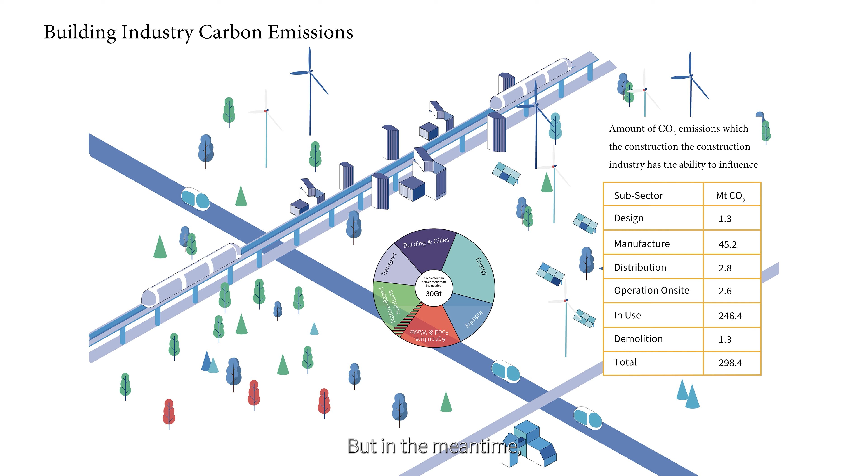But in the meantime, we are not on the right track. According to the report by Materials Culture called Circular Bio-Based Construction in the North East and Yorkshire, only in the North East and Yorkshire of England, there are 2.8 million homes to be retrofitted to meet the EPC Band C standard. Also, the RIBA Climate Challenge target requires that the embodied carbon within buildings should be reduced from 1,200 kilograms per square meter to less than 625 kilograms per square meter. In order to meet the 50% reduction of embodied carbon, there will need to be drastic changes.

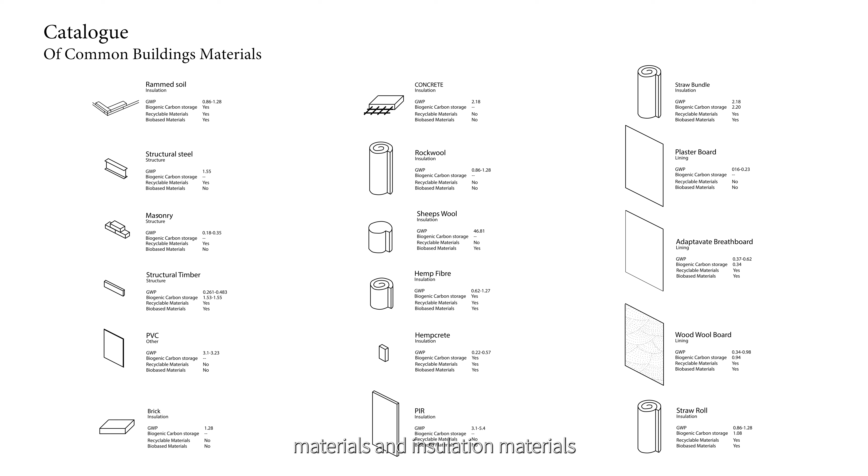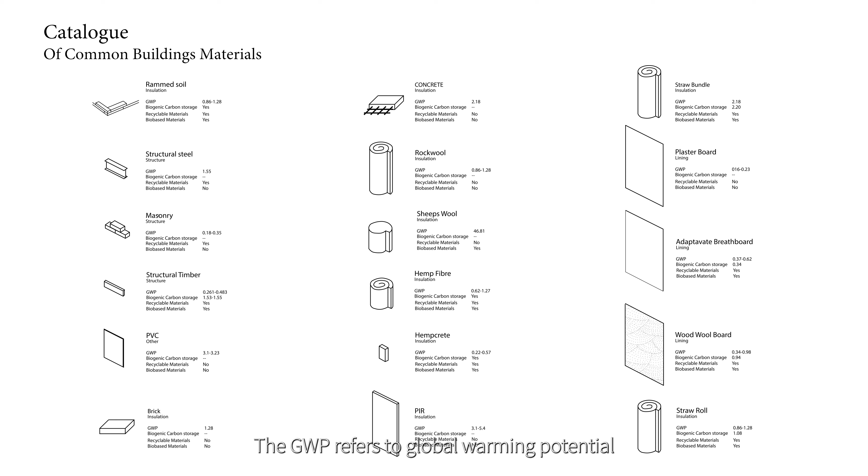An alternative to these has been the exploration and use of bio-based materials, which are characterized by their environmental friendliness and alignment with low or no carbon emissions. This is a catalog of many building materials and insulation materials that we are using nowadays, including both conventional materials and bio-based materials. The GWP refers to global warming potential. Bio-based materials have large advantages over conventional ones. This means that using bio-based material in construction brings significant benefits compared to the current building methods.

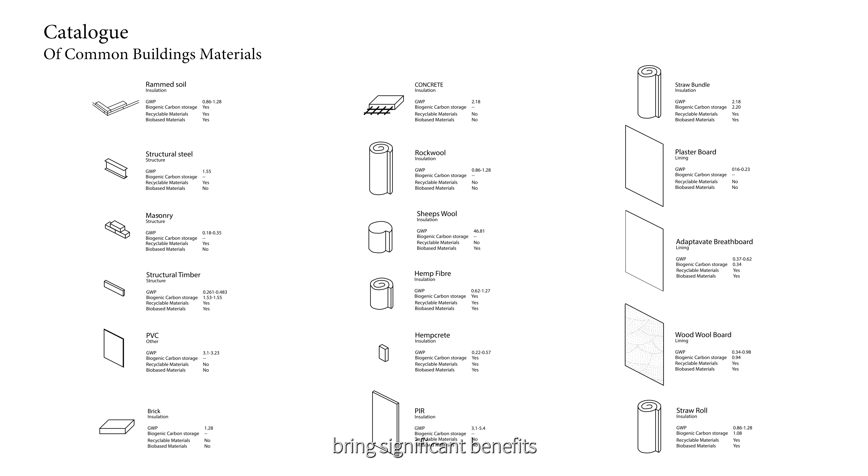The other is a diagram showing the comparison between different building materials and how much carbon dioxide they produce cradle to gate per kilogram. We can see that the bio-based materials, for example, straw, wood fiber, timber, and hempcrete, have totally different characteristics to conventional materials such as concrete, steel, and plastics. They not only have lower carbon emissions in the process, but even absorb the carbon within themselves.

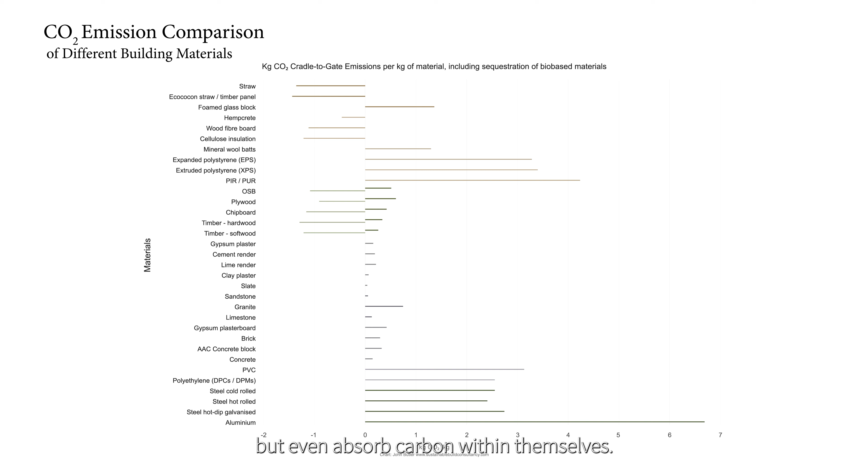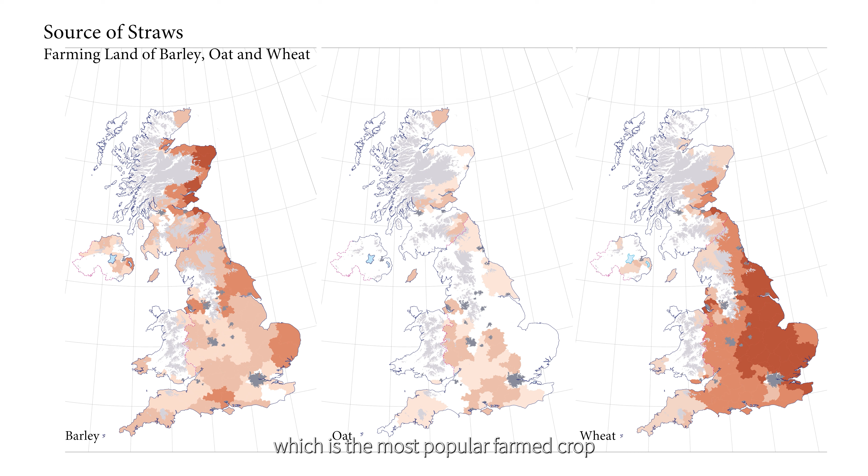In terms of availability, these maps show us the spread of farmland of barley, oats, and wheat in the UK. Wheat is the most popular farmed crop in the country, with a good capacity to adapt to the changing climate and the environment. Straw stalks can be extracted from them and made into different kinds of bio-based materials, such as straw bales or prefabricated straw panels.

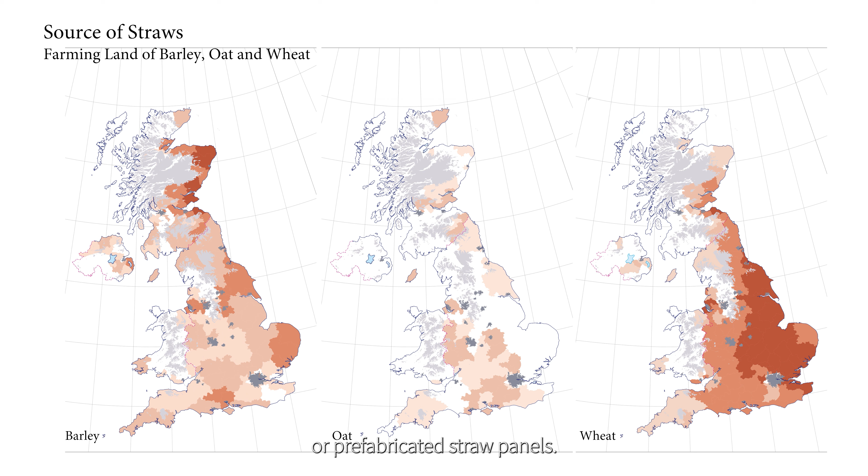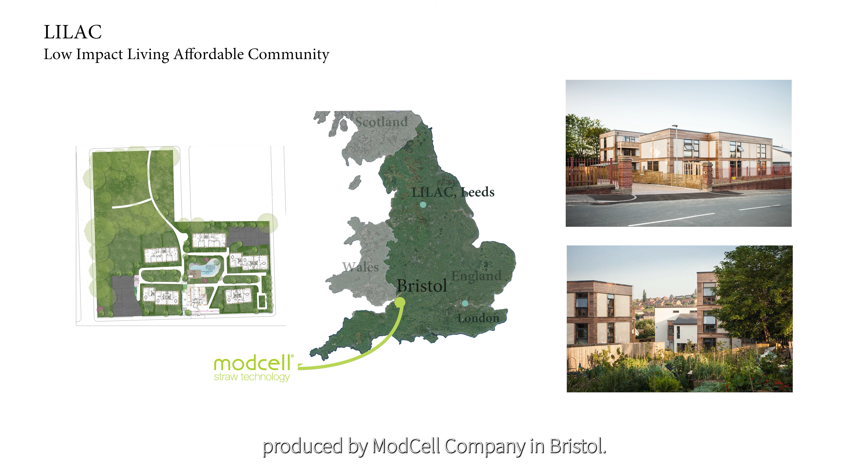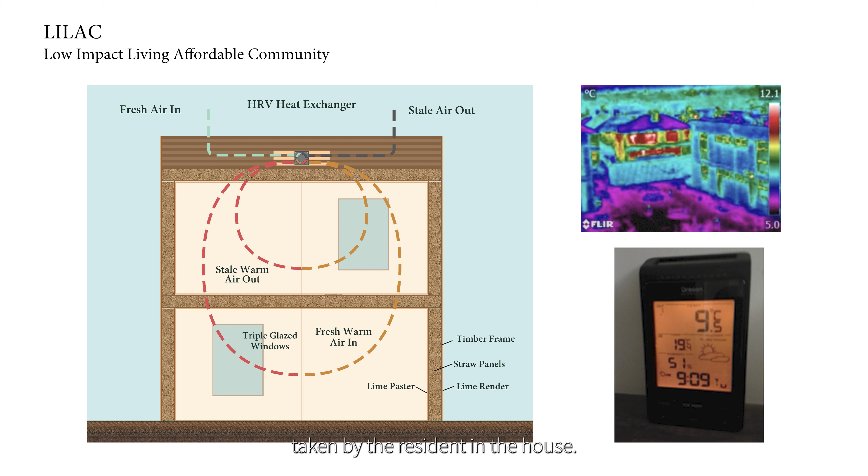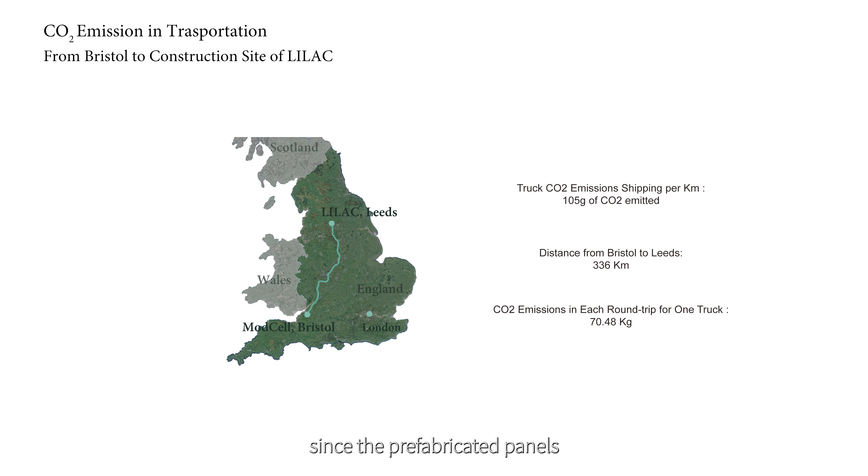Here is a representative project called Lilac, located in Leeds, built with prefabricated straw panels produced by ModCell Company in Bristol. It costs less money to build and has extraordinary insulation performance due to the characteristics of the materials. Here is a thermal image taken by the researcher, and the other is a picture taken by the resident in the house. As we can see, the heat escaping from the houses is lower than the houses behind, which use conventional materials to build. But still, since the prefabricated panels are produced in Bristol, transporting them from such distance demands several trucks driving hundreds of miles.

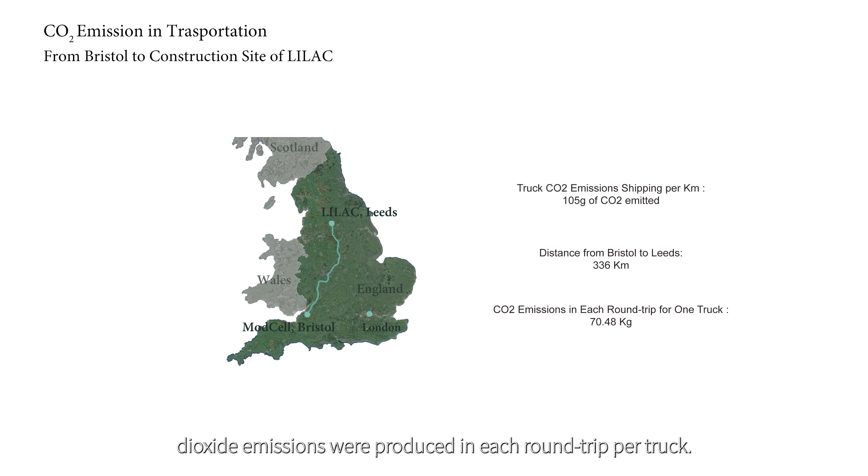A quick and rough calculation shows at least 70.48 kilograms of carbon dioxide emissions were produced in each round trip per truck. From this issue, we can see that only using bio-based material doesn't mean that the building industry can be transformed or that the net zero policy is enough to reach goals such as the Paris Agreement of 1.5 degrees. To minimize carbon emissions, we should not only improve the materials we use to build, but also think about the carbon dioxide we produce as part of the whole system that makes up the building industry.

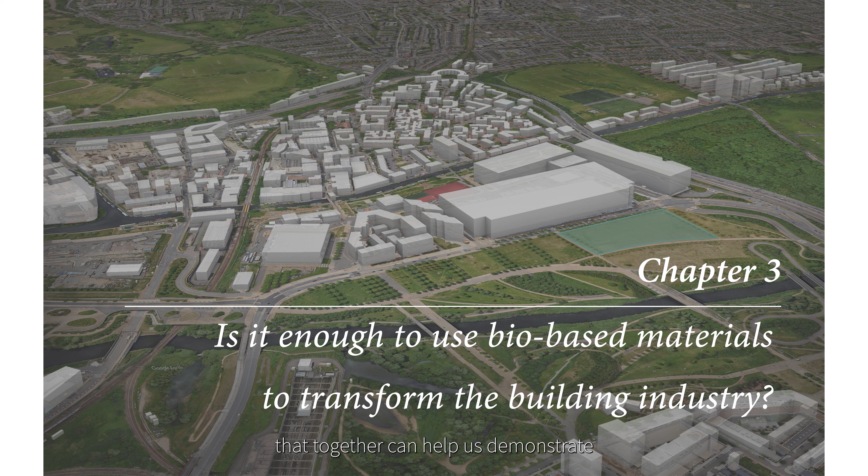To test this basic idea, we looked at 3 projects that together can help us demonstrate how a new strategy for the building industry can start to be imagined. So, we studied the main features of these 3 projects to see how they can be linked to further our research.

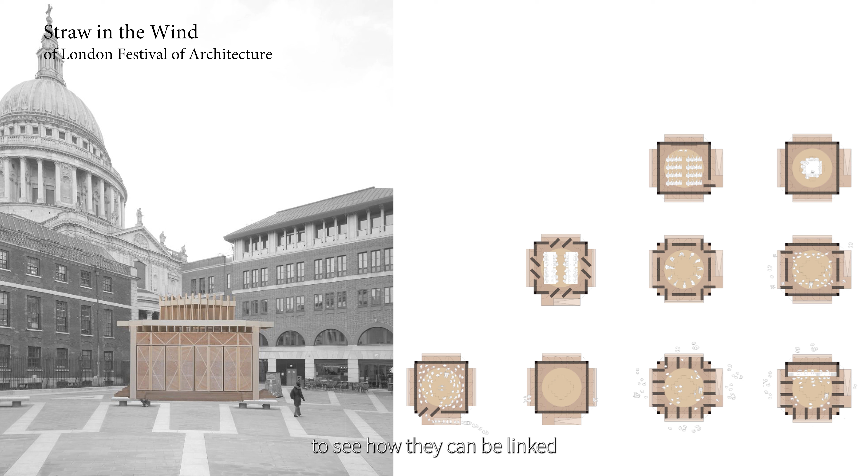First, we took a look at the winning proposal for the Eco Home Pavilion promoted by the London Festival of Architecture, called Straw in the Wind. It has been planned to be built as a temporary building in front of St. Paul's Cathedral in the summer of 2024. Made from straw, the purpose of the pavilion is to raise awareness of bio-based material and to demonstrate that, for example, straw can be used as a construction material with many properties and advantages over materials like concrete, bricks, and steel, and provide a carbon-neutral building.

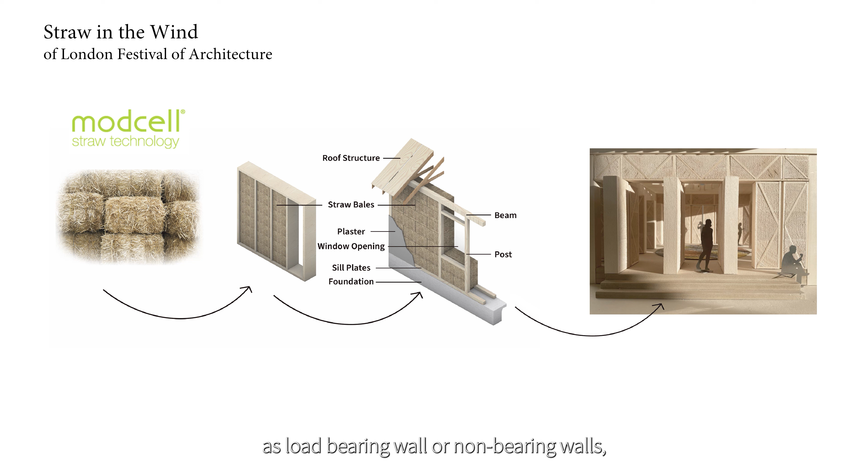We want to see how it is designed, what it takes to produce these building materials, and whether it is possible to produce them on site. To answer these questions, we start by analyzing the pavilion structure to understand the components they're using. With straw filled into the timber frame structure, Modcell Company provides this kind of straw panel that can be directly used as load-bearing or non-bearing walls. Straw in the Wind used these panels to structure the pavilion. Revolving panels can open or close the walls, allowing people to pass through every side of the pavilion and making it a versatile space for a flexible future program.

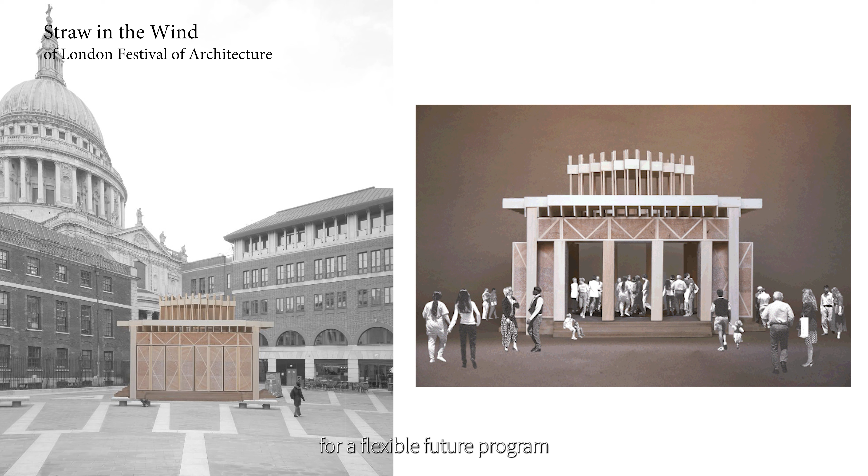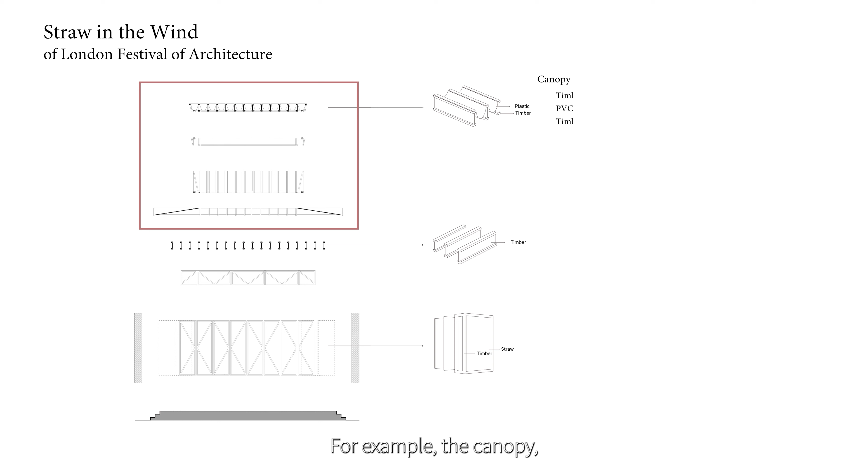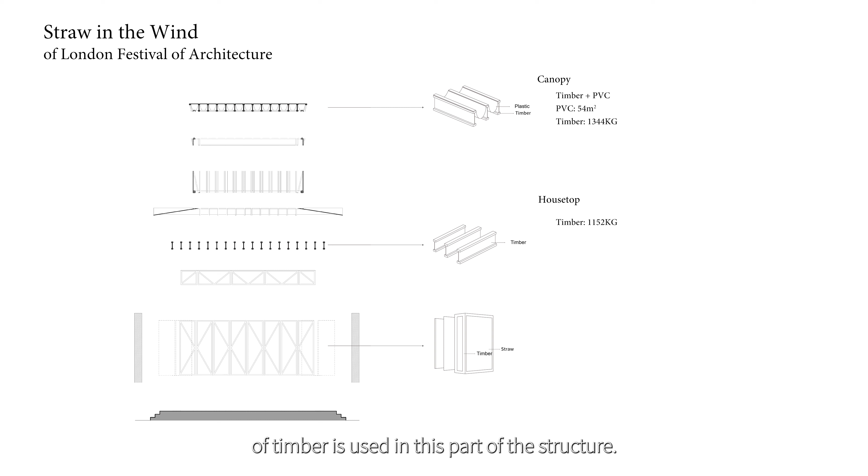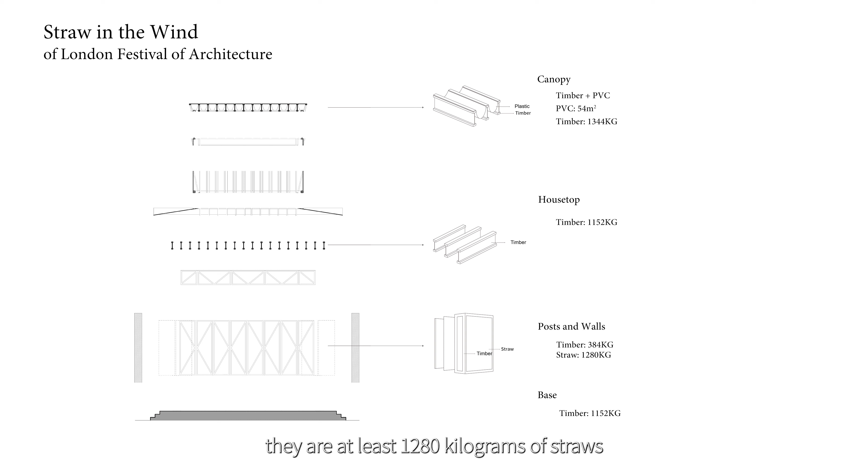In order to have a further understanding of how the system works, we calculated the amount of materials needed for the pavilion. For example, the canopy consists of timber and recycled plastic sheets. Timber is about 1,344 kilograms, and the plastics are around 54 square meters. As for the housetop, the beams are all made from timber. Approximately 1,152 kilograms of timber is used in this part of the structure. Beneath the top, 4 timber posts support the ceiling, and all the surrounding walls are made from straw panels. In the panels, there are at least 1,280 kilograms of straw, and the timber frame weighs about 384 kilograms.

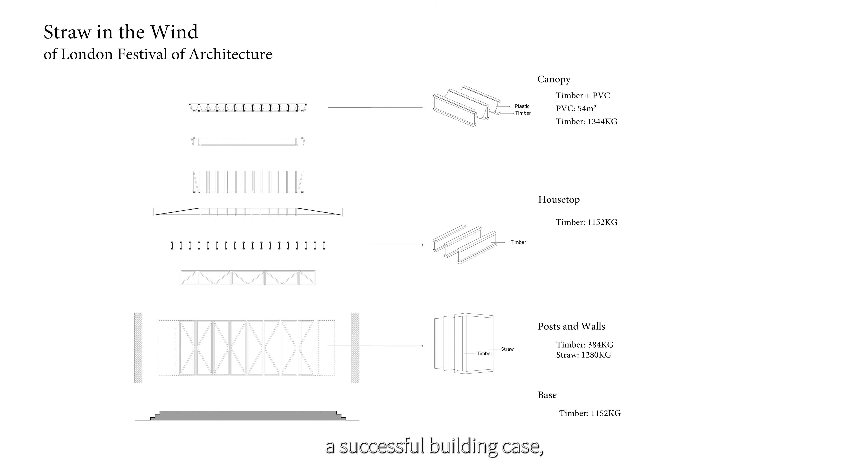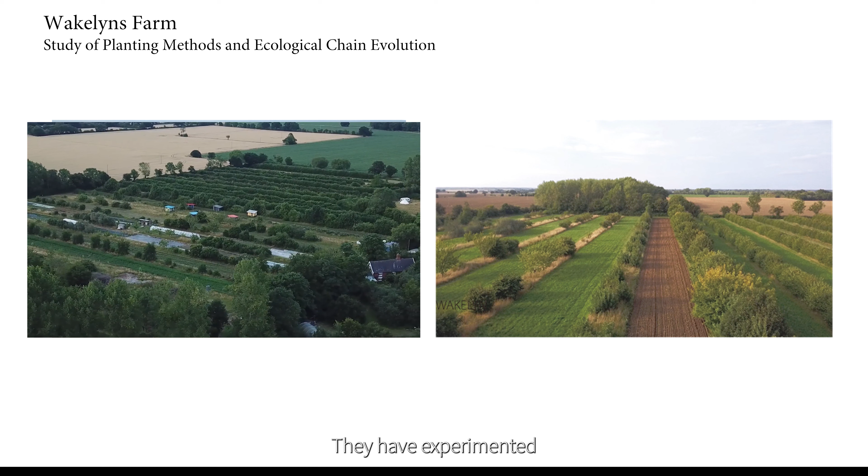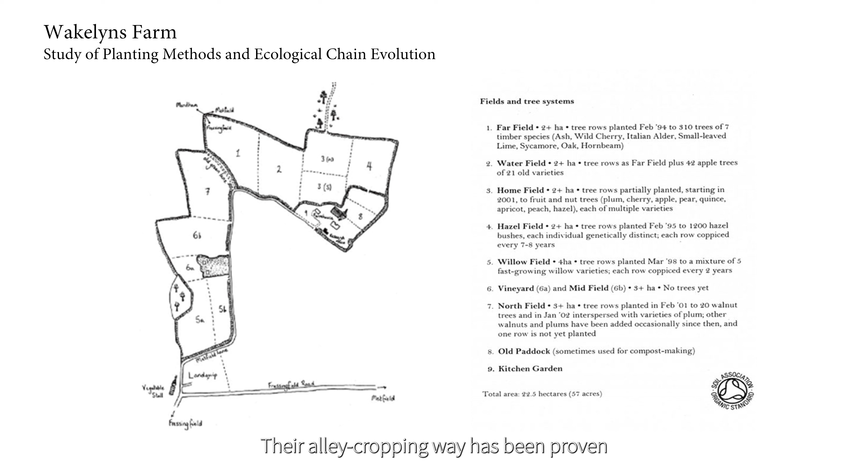This project provides a successful building case, but what about the production and manufacture of the materials? Is it possible to integrate this with the principles of agroecological production? So this is why we study another case called Wakelyns Farm. Wakelyns Farm is a 22.5 hectare arable farm in Suffolk. They have experimented with agroforestry systems and collaborated with the Organic Research Center to collect data and promote sustainable agriculture. Their alley cropping has been proven to be the best way of crop farming nowadays.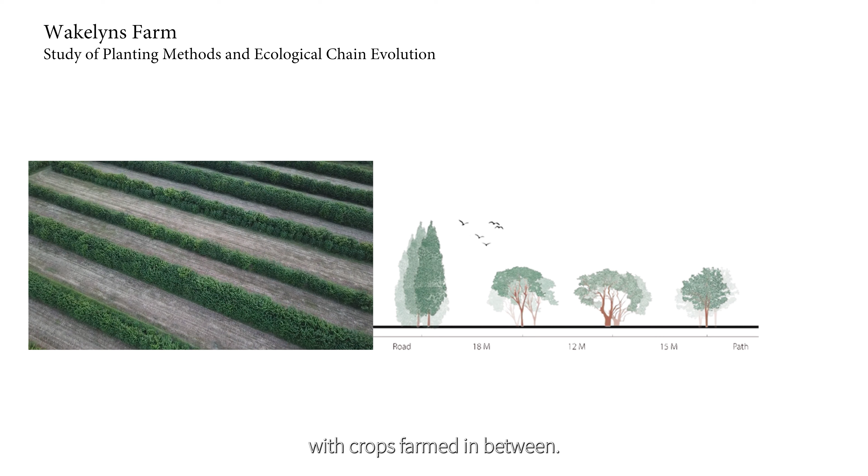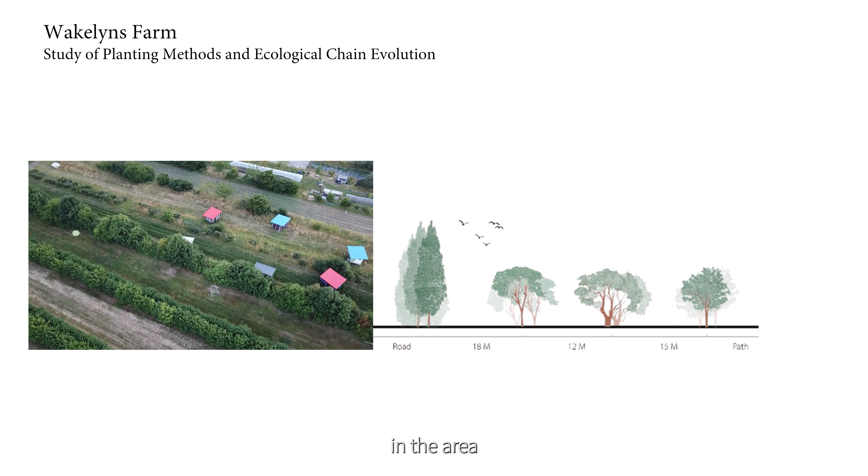They have in total 56 rows of trees in the whole area, with a tree row gap of 10 to 12 meters. With crops farmed in between, they can prevent insects from attacking crops from land to land and keep fragile crops away from the strong wind. They also help to build up the environment in the area by producing wood sticks and experimenting with hemp production. This diagram shows the biodiversity evolution in the first few years Wakelyns Farm was established, which is an added value of this type of agroecological environment.

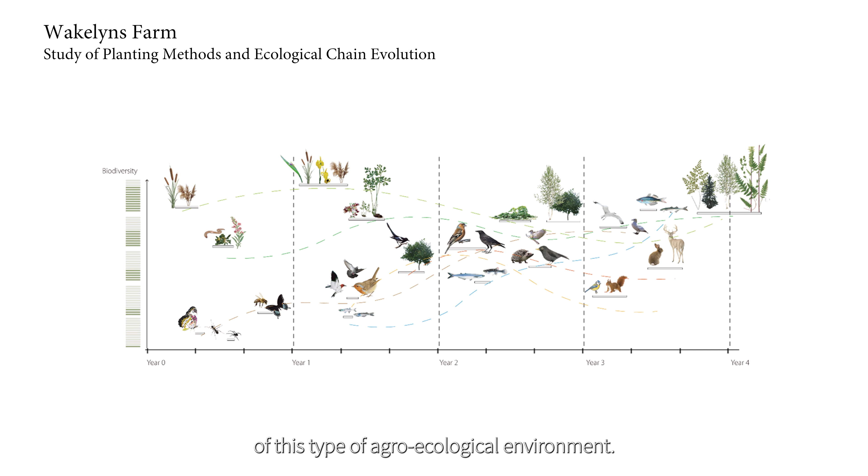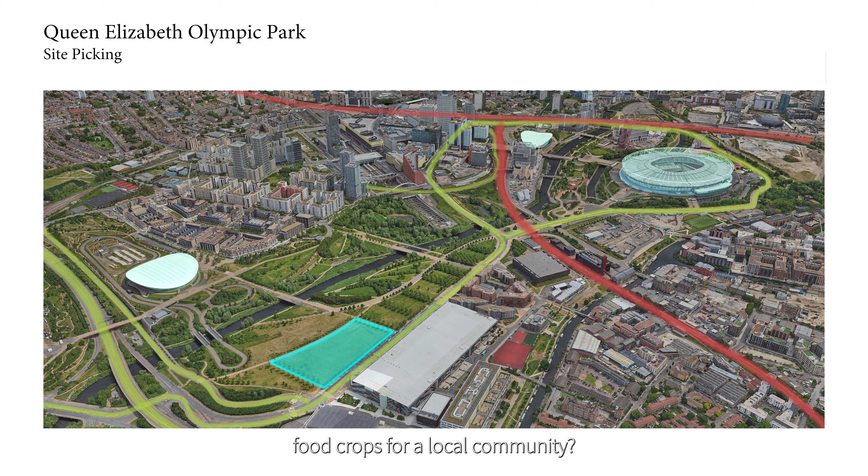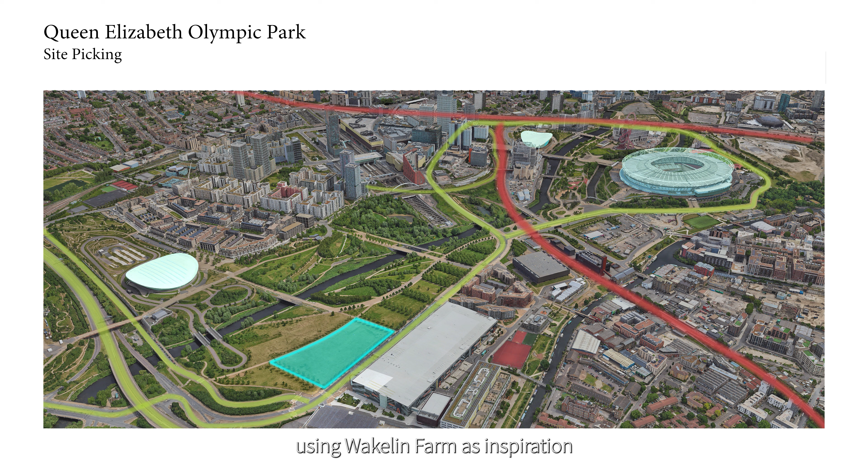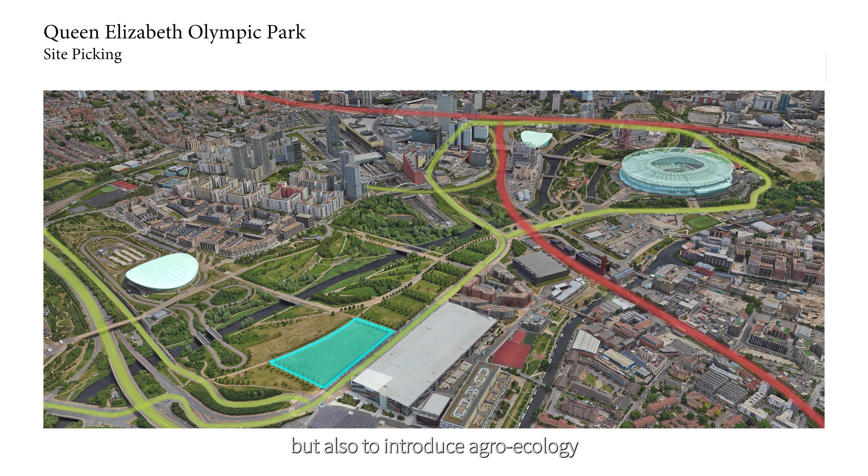So, instead of bringing straw from large monoculture landscapes, how about farming and collecting the straw from our own site and using it on site, while providing a variety of food crops for a local community? Finally, we decided to test this in Queen Elizabeth Olympic Park, using Wakelyns Farm as an inspiration to organize agroecological farming. We are going to select a piece of land where we can potentially plant and harvest straw to build the Straw in the Wind pavilion, but also to introduce agroecology, so the pavilion can be provided with materials and products for its future program by our agroecological landscape.

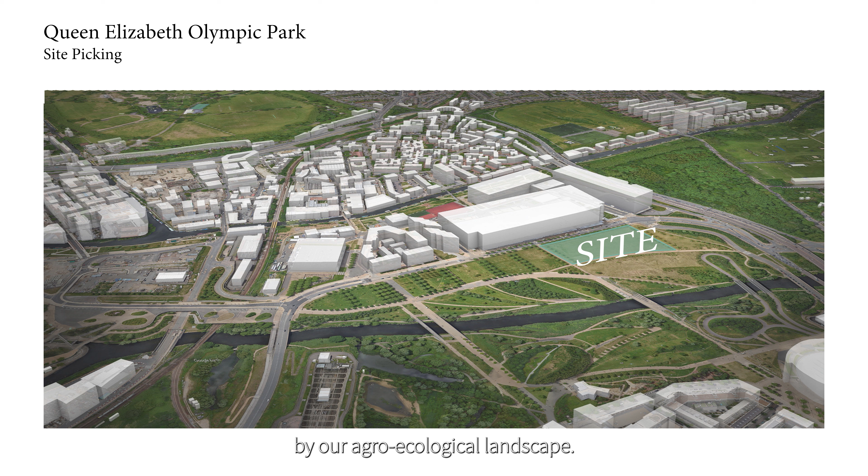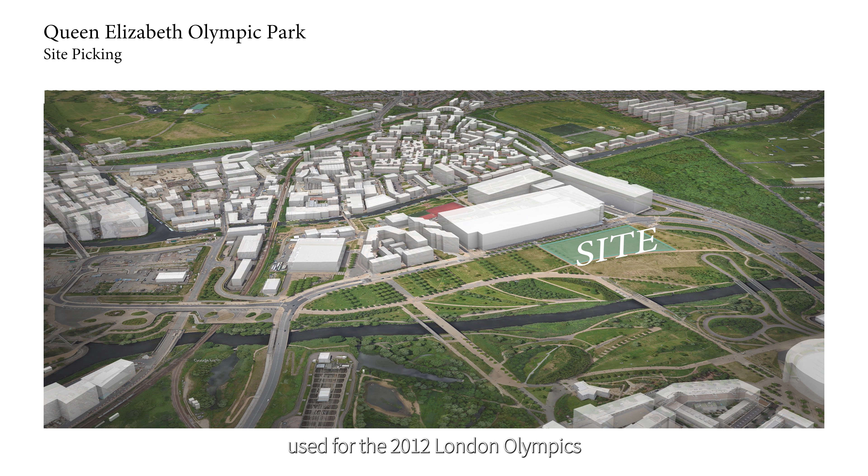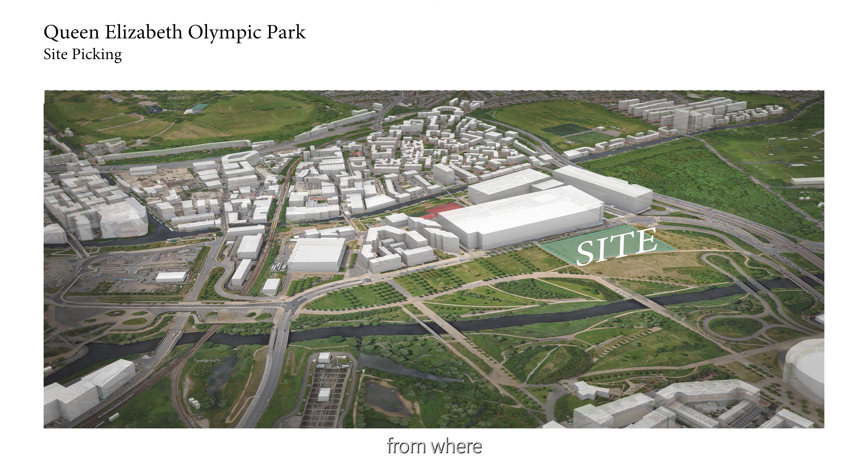We selected this piece of land within the Queen Elizabeth Olympic Park. It's in the east of central London, used for the 2012 London Olympics, and is now a part of the parklands. We imagine that we can lease this patch of land in a similar way public interest enterprises have been doing in the park to provide services, such as the commercial pavilions existing throughout the park. The land marked is today a rarely used lawn within the park with little or no vegetation. Still, it is an interesting location next to Hackney Wick, a hub of the creative and fabrication industry, from where we could draw some synergy in the future.

Our plan is divided into 3 major parts: healing, farming, and sharing. When we looked into the site, we noticed that soil health was influenced by former construction that happened upon it. The first thing to do is to heal the soil.

After restoring the nutrition of the soil, we should move on to farming. Farming includes crops and other vegetation. After harvesting enough, it is to share the benefits of the harvest with the community.

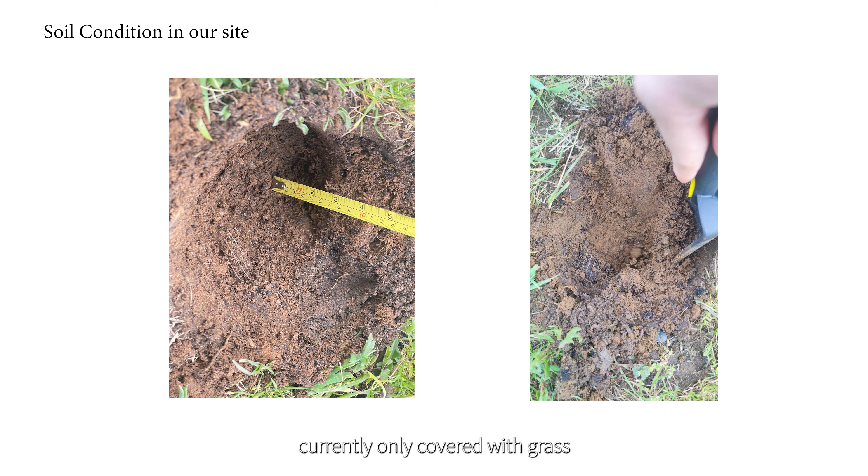The soil situation is that sandy soil is on the surface, currently only covered with grass, with some earthworms about 10 centimeters down after digging.

In the first year, the primary focus is on soil improvement. The site is known to have soil that was treated to mitigate pollution after the 2012 Olympics, and it meets the conditions for herbaceous plant growth. However, some deficiencies still exist in the soil structure.

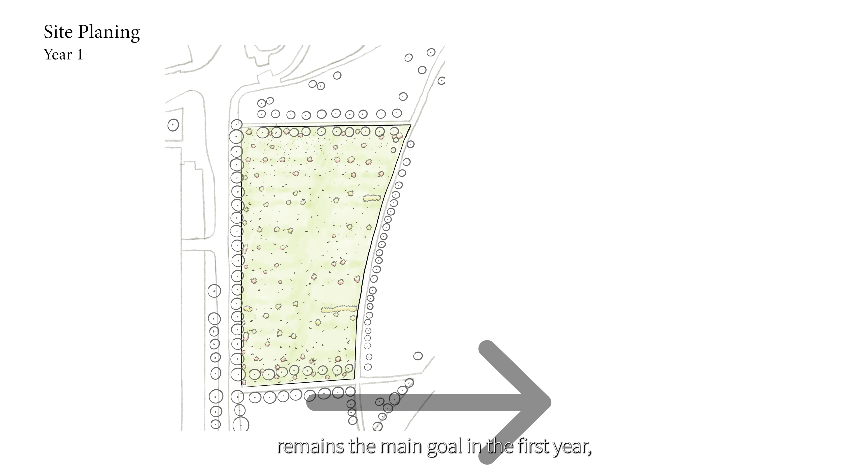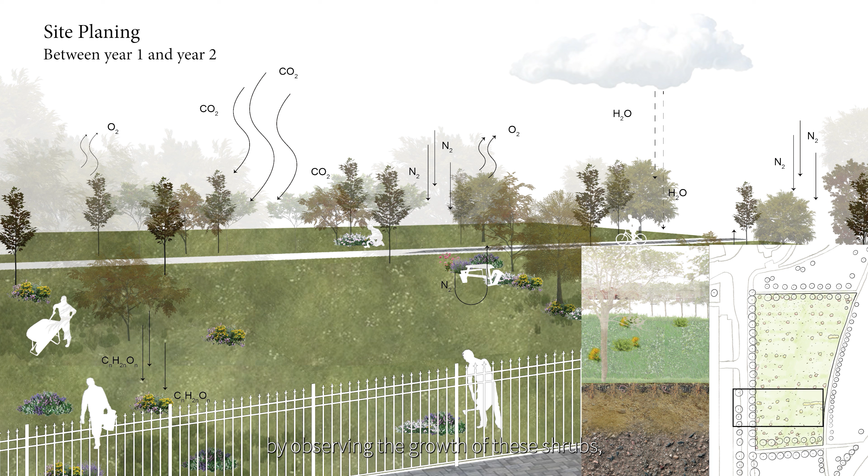So soil improvement remains the main goal in the first year, using 3 kinds of nitrogen-fixing plants to transform the soil of the site. These plants have nitrogen-fixing bacterial symbiosis on the root system, and the soil's nitrogen content increases after planting. During the transition from the first year to the second year, some small shrubs are interplanted to assess soil quality by observing their growth, providing insights for future planting.

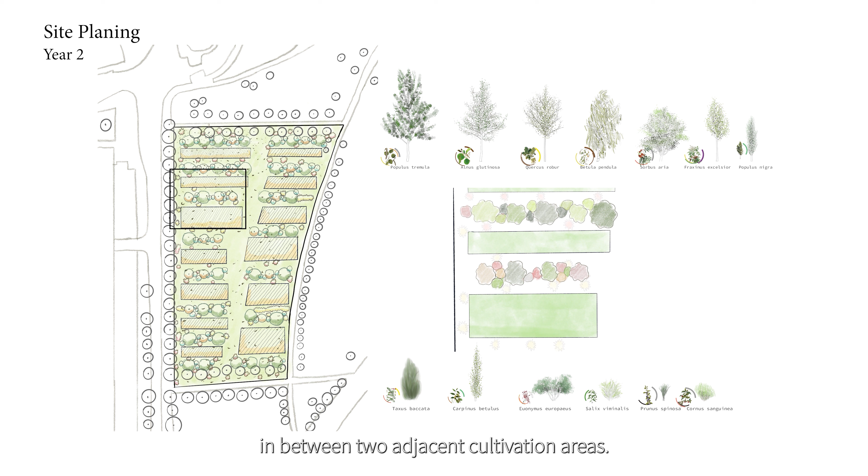In the second year, trees start to be planted. Following the experience of Wakelyns farm, tree rows are planted between 2 adjacent cultivation areas. This reduces wind damage to young crops, and also provides some insulation against pests and disease, reducing the environmental impact of pesticide use.

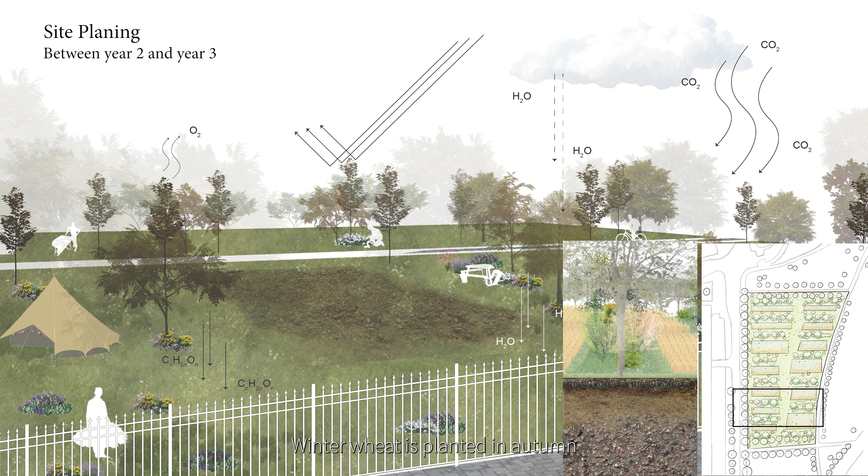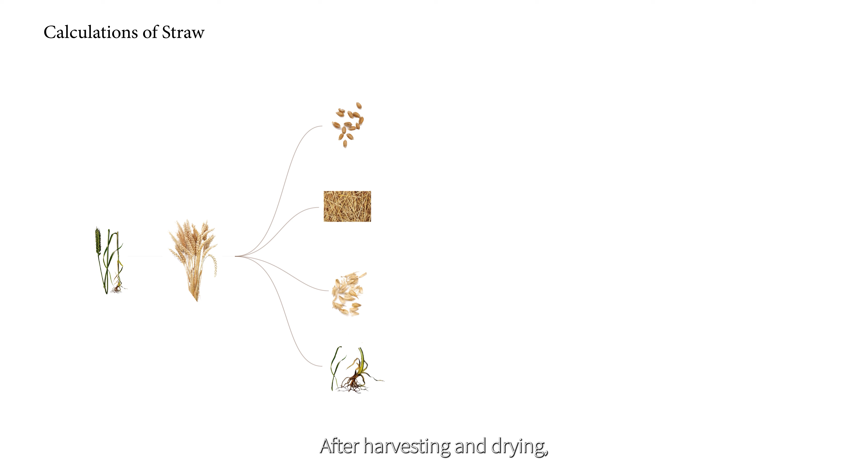In the cultivation areas, winter wheat is planted in autumn and harvested the next summer. The first picture illustrates what a wheat crop looks like. After harvesting and drying, we acquire the dry matter of the wheat.

For our project, we will focus on straw and what is needed for its production. 51% of the weight belongs to the grain, 32% belongs to straw, 11% belongs to the chaff, and the remaining 6% are leaves and dead shoots. 32% of them are what are known as straws.

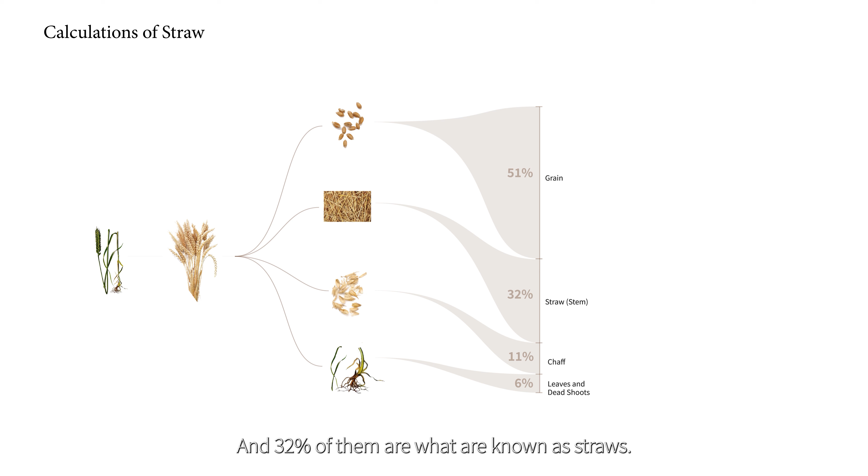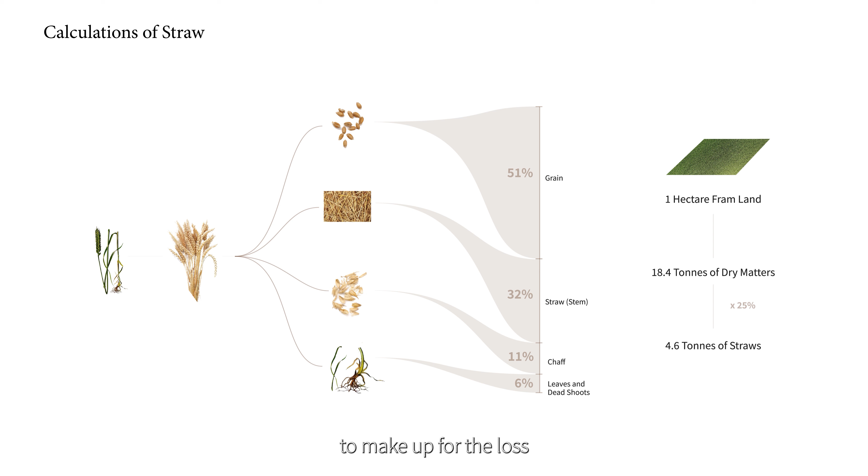According to existing statistics, in 1 hectare of land, you can harvest 18.4 tons of dry matter in 1 year. To be safe, you can count on 25% loss through transportation and selection. That means we can acquire 4.6 tons of straw from 1 hectare of farming land.

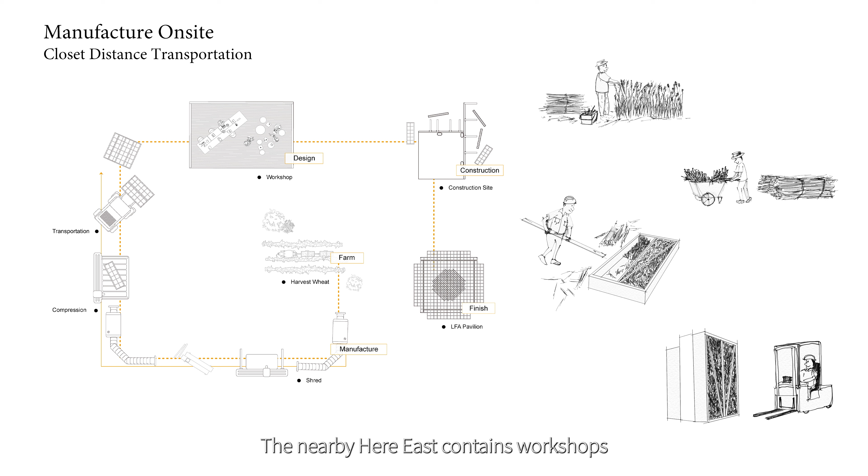The nearby Here East contains workshops and university labs, which can help us with the manufacturing process. Also, the ModCell company can provide the expertise necessary to assemble the prefabricated straw panels.

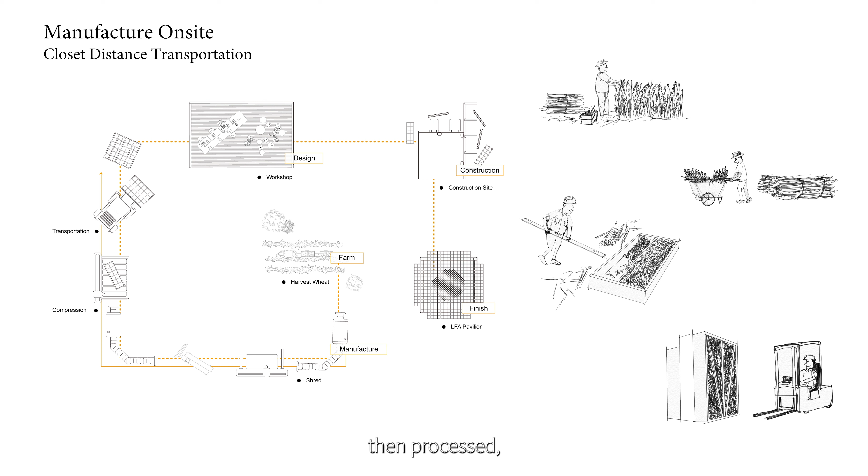After harvesting the wheat straw from the site, the raw materials would be chopped and processed. Then it would be filled into timber frames and made into panels. The panels can be used on site to build up a pavilion.

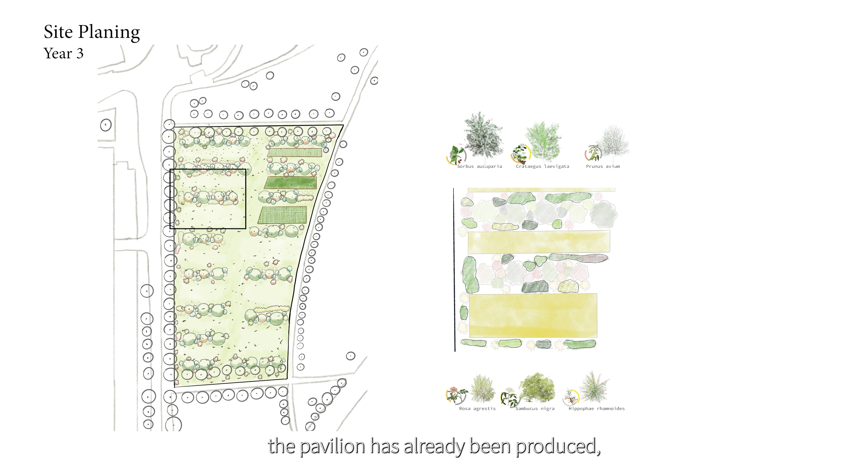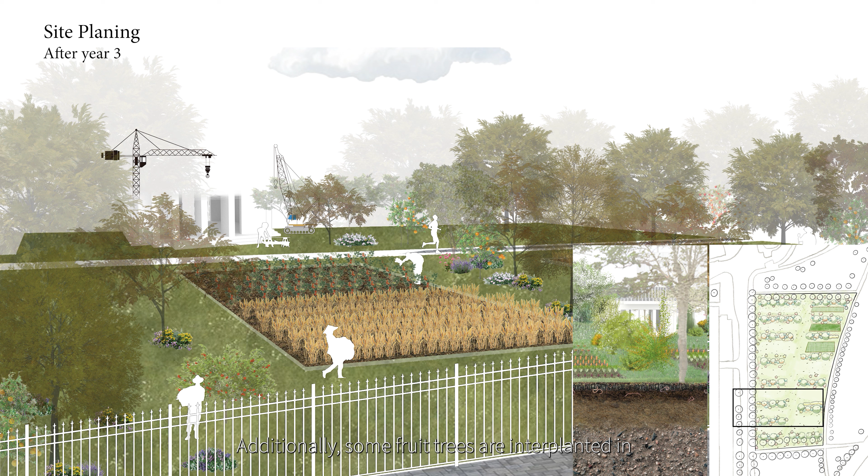Then in the third year, as most of the straw required for constructing the pavilion has already been produced, some straw planting areas are transformed to grow vegetables. This helps in soil rejuvenation while ensuring progress in the construction of the Straw in the Wind pavilion. Additionally, some fruit trees are interplanted in the isolation zones for city farm production.

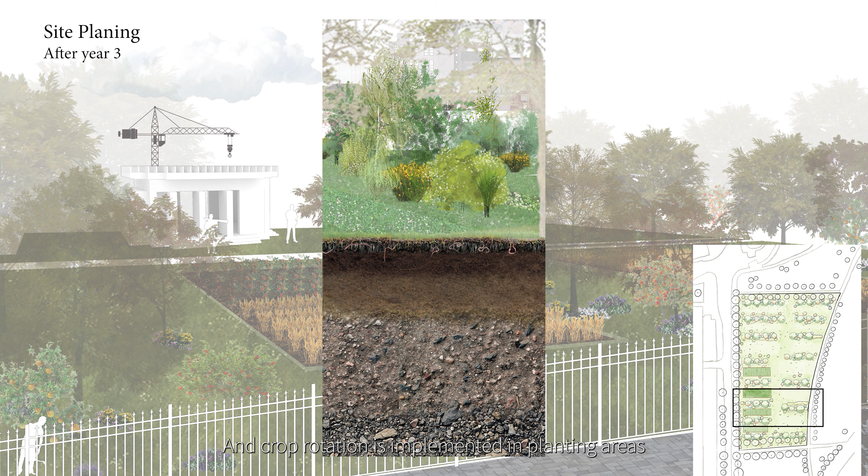In the fourth year, all construction on the site is completed, and crop rotation is implemented in planting areas within the site. Some of these planting areas are converted into growing beds, serving the daily needs of the community. Extra wheat and straw can be provided to local restaurants or made into more panels for construction nearby.

After all this has been done, we can see from the section how it is transformed from this vacant land to this lively, lush land with abundant biodiversity.

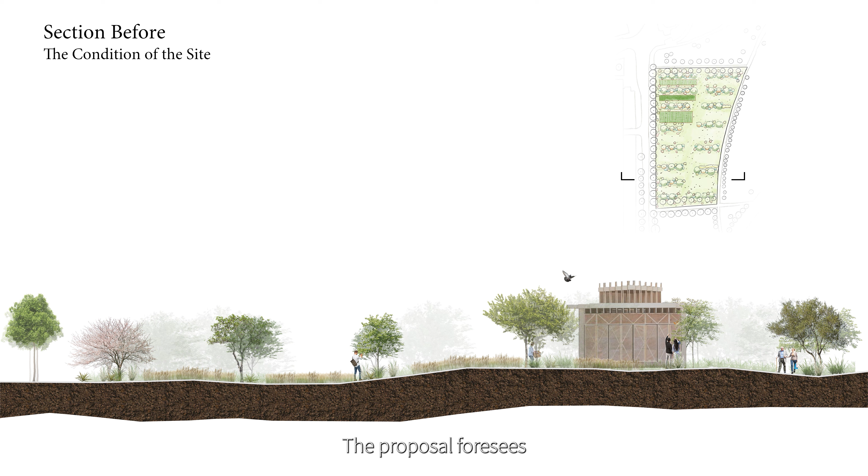The proposal foresees the integration of a pavilion such as Straw in the Wind with the local community, using as much as possible the land available to produce necessary materials for construction, while benefiting from the production of a variety of crops which can be used to serve and distribute some samples of food to local veggie boxes for educational purposes, to the nearby primary school, or provide some basic ingredients to zero-waste restaurants such as Silo in Hackney Wick. In short, to create and expand synergies and ecologies beyond the use of bio-based materials in the building industry.

What we try to do here is a more comprehensive system. We did this experiment to see if producing construction materials on site is possible, and to expand the usage of farming land in the afterlife.